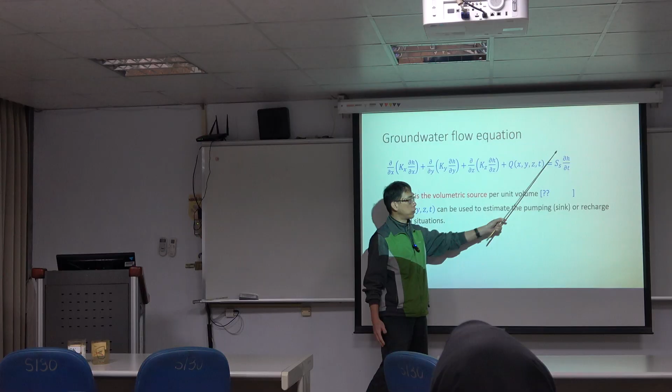Emphasize again, emphasize the content. So in the groundwater flow equations, we have two parameters, meaning the hydraulic conductivity and storativity. And these two parameters control the groundwater behaviors in the hydrogeological system. So if the storage is able to be ignored, that means we go back to the so-called steady state condition. So we will only have the hydraulic conductivity to control the whole behavior. We don't need to consider the storage coefficient, or we do not have the storage effect.

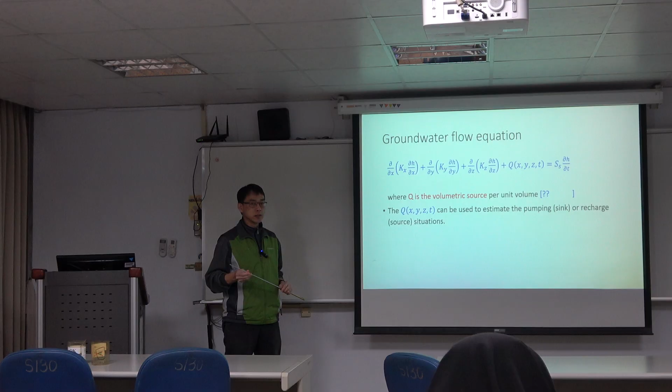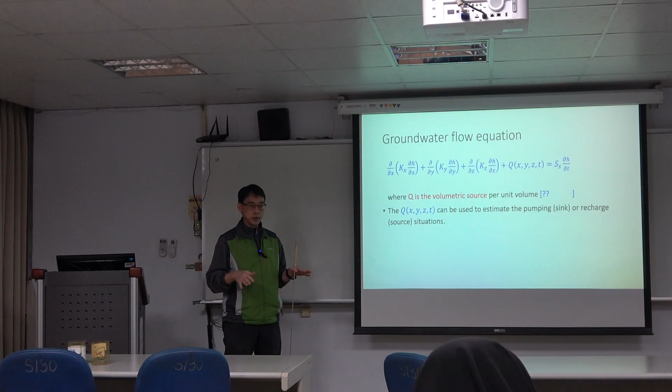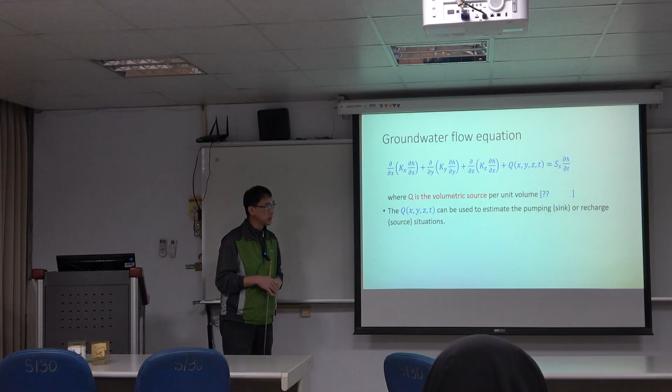So one of the important things is that when we're talking about the steady state, it does not mean there is no time influence. That means the time is infinity. So when time is infinity, they will reach an equilibrium condition. But in reality, groundwater still flows. Okay, it does not stop flowing. It still has flow, but the flow in is equal to the flow out. So it just gradually moves. Okay, so the head quantities do not change. So let's read what we mean. The storage effect is ignored. So the storage coefficient only exists for transient state conditions.

And we said the storage coefficient is quite interesting because it provides the extra water that we pump. So when we pump water in an unconfined system, it is very easy to imagine because the water just releases from the pore spaces. So the water is drained from the pore spaces to your well, and we are able to collect the water. But for a confined system, it will be a little weird, because it looks like it does not have water change. There are no water variations, but we are still able to collect water.

So researchers use two mechanisms to explain the behavior. One we call compressibility of the matrix. That means the pore spaces are compressed, so the water is squeezed out. And the other is the water's ability to expand. So when you decrease the pressure, the water expands, so the extra water can be provided. So these are the two mechanisms for the confined system.

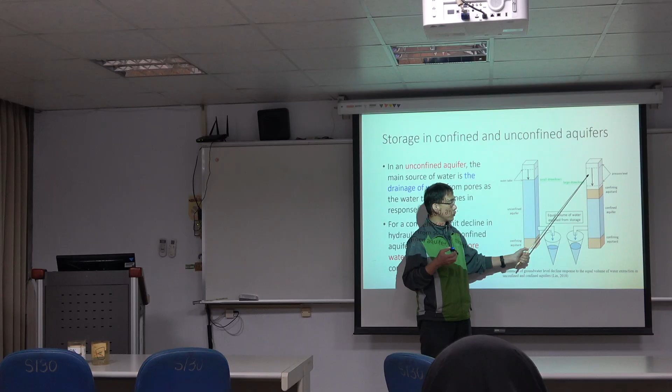So as I mentioned, if we take a look at the whole picture here, in the confined aquifer, all the water occupies these spaces, but we have the imagined water level. Okay, the imagined water level will decline. That means the pressure in the system declines. But in reality, we are not able to observe this kind of decline.

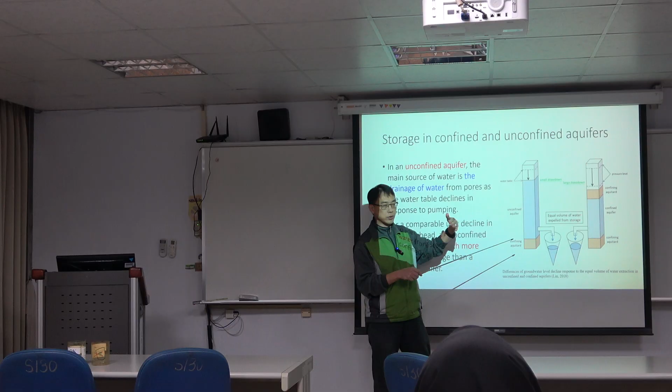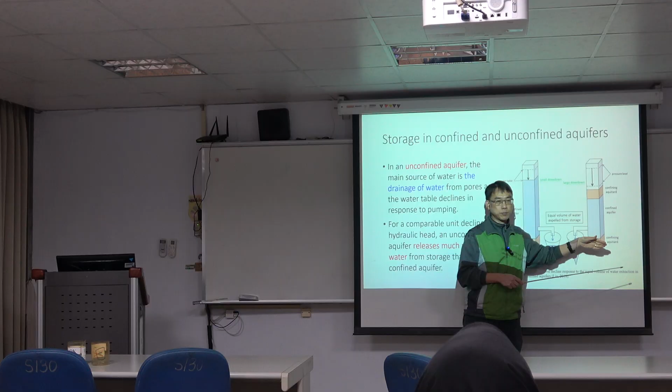So regarding geophysical surveys, I also asked some of the professors in hydrogeological survey. They mentioned they can use geophysical surveys to assess groundwater level variations, because we have saturation and unsaturation, so they can use resistivity or conductivity to assess this interface. It could be possible. But I asked them if their methods can assess this kind of behavior, because the water does not change. What changes is only the inside pressure. So are geophysical surveys able to detect that or not? They mentioned maybe not. Okay.

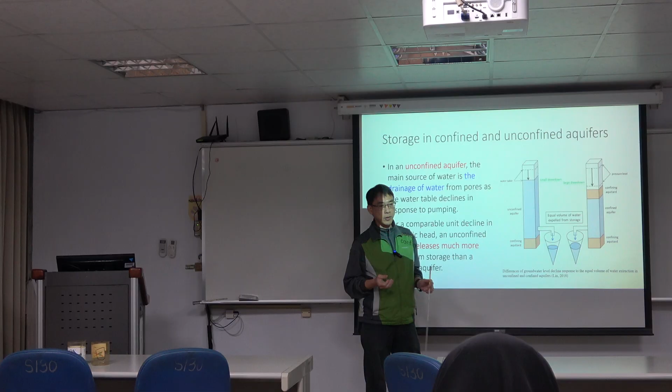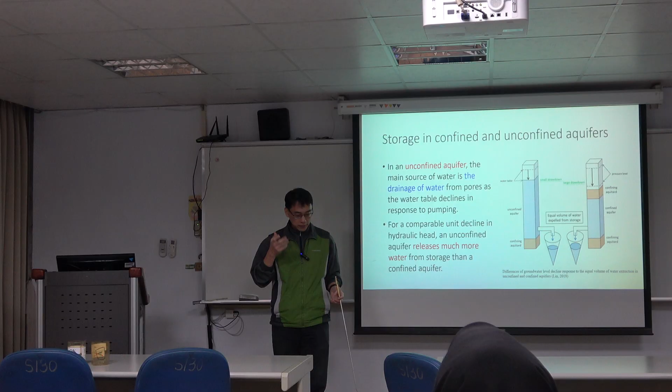So geophysical surveys are used to survey groundwater conditions, commonly in the unsaturated zone. But for the saturated zone, right now it's maybe not easy to detect. But I guess it's still possible. For example, if we use gravity, the water amount could vary. Like I mentioned, originally the water is dense, but after it expands, maybe the total water amount still decreases, or its density decreases, or its mass decreases. Okay, because if we look at the concept of expansion, originally the water is very condensed. So after we release the pressure, it expands, so it becomes not so dense, it becomes loose. Okay, a concept like that.

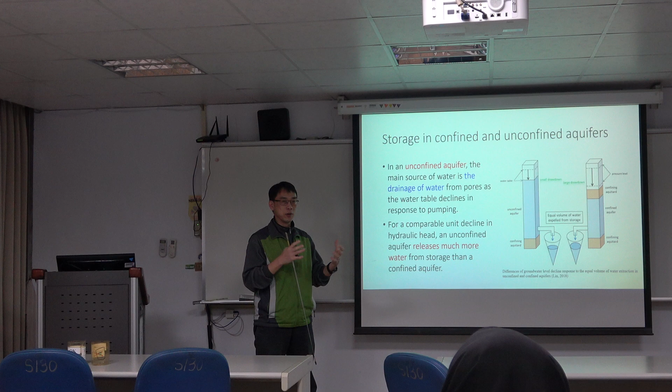So maybe their mass will change due to the gravity change, due to the density changes. Although in the groundwater system, we always assume that the density, viscosity, and the other properties are the same; they do not change. Okay, so that's the assumption from groundwater hydrology. We do not consider the change for that.

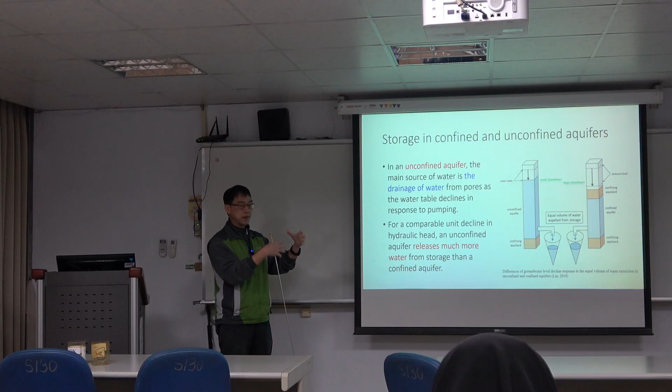And if you would like to assess more completely, you need to consider the compressibility of the soil matrix and also the water. That will be more complete to describe the behaviors. But for the gravity term, you also need to consider the gravity term change. Not gravity term, we call it the body force. Okay, the body force might be affected. Gravity is the same, but if your density or your mass changes, it will also be affected. Okay, so it will be quite complex if you'd like to assess more completely.

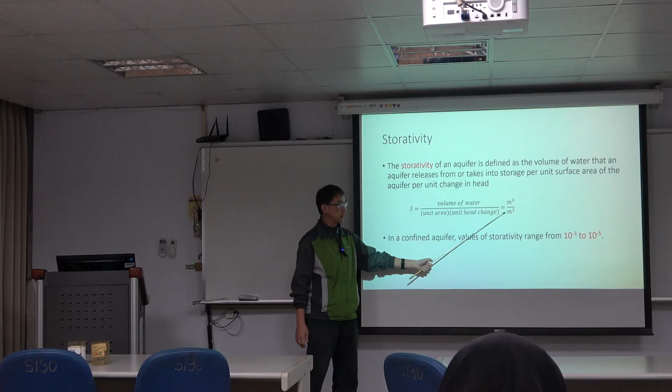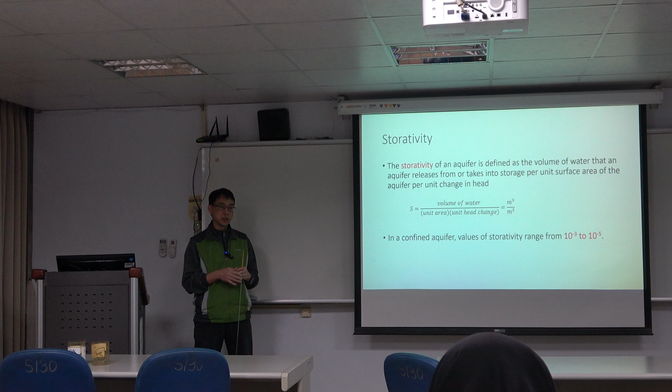Okay, so for storativity, the concept is you need to count the head, how much water is released. So the concept will be like that, but we sometimes use the unit area. Okay, so we will obtain this kind of quantity. So the storativity, you can see, has the unit cubic meter divided by cubic meter, so we do not have a unit. And the quantity for confined systems is relatively small because, as I mentioned, confined aquifers mainly release water from matrix compression and also the expansion of the water. And we can imagine that it could be quite slight, not so large an amount.

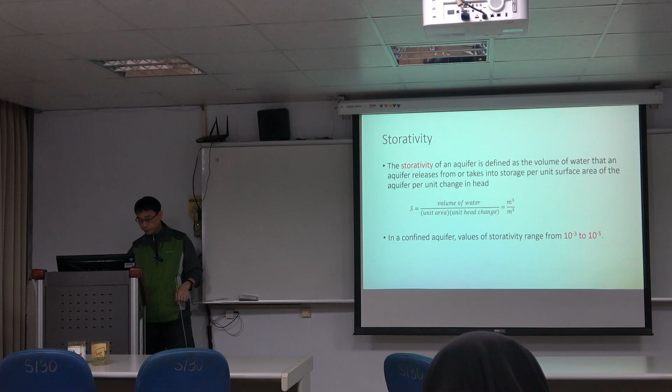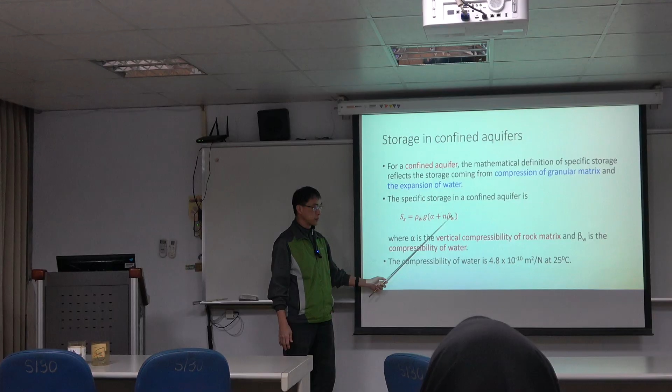And if you take a look at the compressibility of the water, approximately 10 to the minus 10, you'll be able to know that this quantity is quite small. Okay. So although you multiply by gamma W here, the quantity is still around 10 to the minus 5, so it's also not quite large compared to the specific yield or the unsaturated zone.

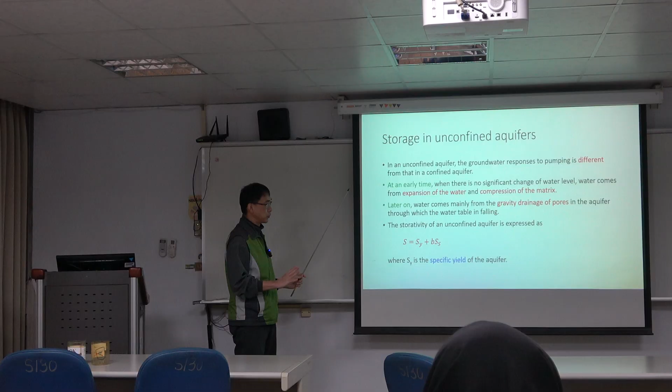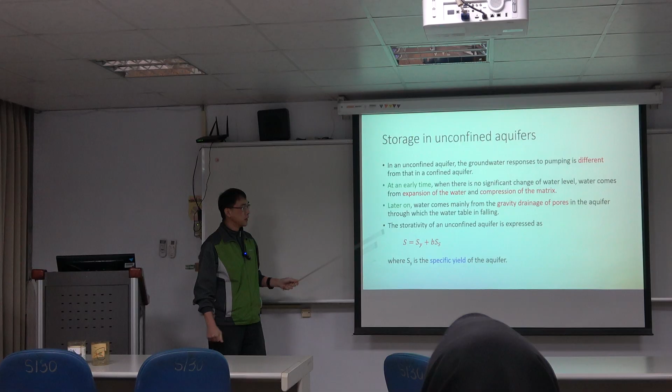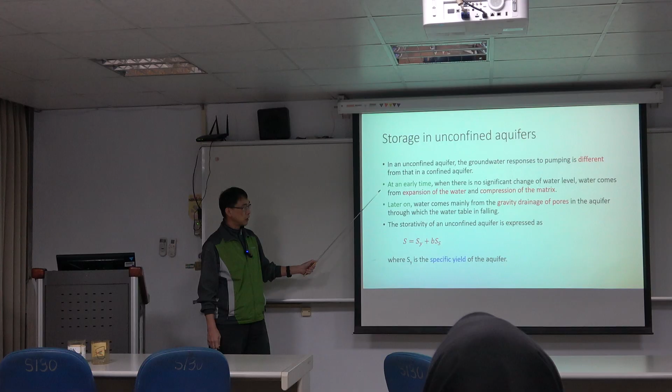And for unconfined systems, we can separate into two steps, the early time and the later time. In the early time, the condition is a kind of undrained condition, like a confined condition. So in early time, we are able to use the storage coefficient from the confined system, and in later time we use gravity drainage to describe the behavior. So that means the storage coefficient can be combined from the specific yield and specific storage.

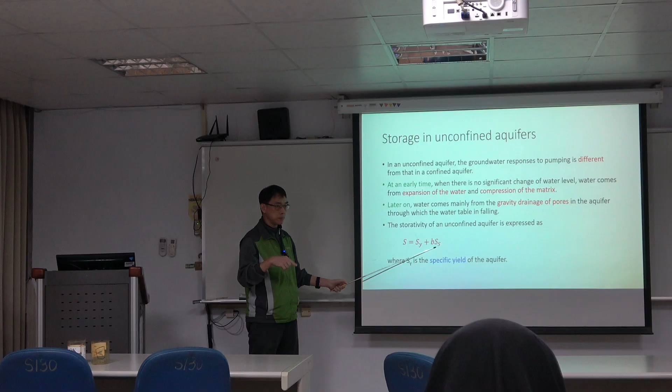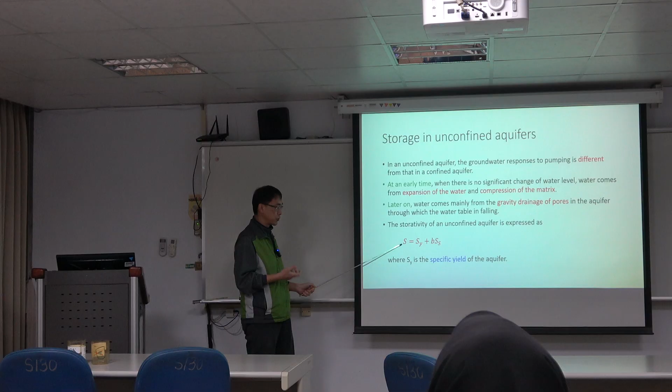But remember that in physical equations, all the units need to have the same dimensions. So SY, SS, we know SS is 1 divided by meters, the length. It has the unit of length. So we need to multiply by the length, and then we can eliminate the unit to become dimensionless. And this is dimensionless and dimensionless, so they can be added together. Okay, we call this specific yield and specific storage, and combine them together to be the storativity or storage coefficient.

And as we know, specific yield is relatively large, and this is for the unconfined system. That's from gravity drainage, and it is highly related to the porosity. So the quantity is commonly from 0.1, not 0.01. Okay, 0.1 to 0.3, because commonly the porosity is around 0.3. It could be higher, but not very common, because when you have a higher porosity, it might imply that you have silt and clay, and they do not easily drain by gravity.

Okay, so for the unconfined, this quantity, for the confined, this quantity. So although we can write them down together, we know that this quantity is relatively small. Okay, three orders smaller, and if you have a very thick aquifer, maybe it's still able to have a relatively larger quantity. Compare with the SY values, commonly of order 0.1.

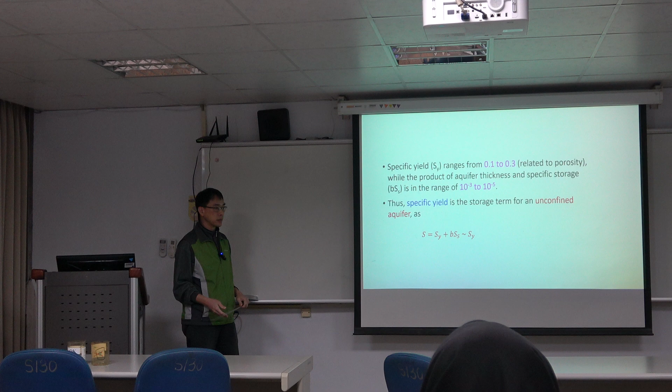So this quantity will be relatively small, and we will simplify or eliminate this term, and we can only have the Sy values. So in unconfined aquifers, commonly we use the specific yield, not the specific storage coefficient. Okay, so this is the concept.

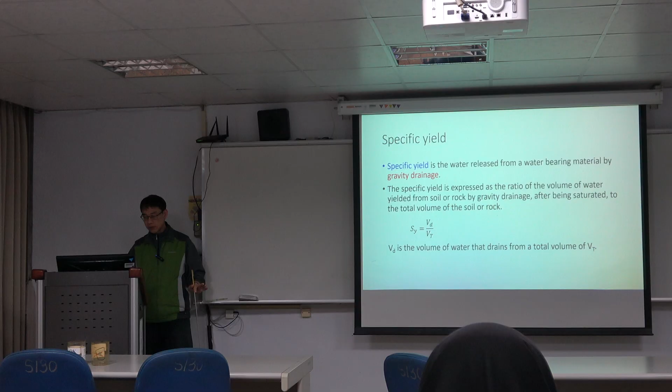And the later content I think I will skip, because they try to combine it with specific retention. That's the residual part. I think we already mentioned it last semester. So if you don't understand that, maybe you can read it by yourself. So the concept here is a very important part.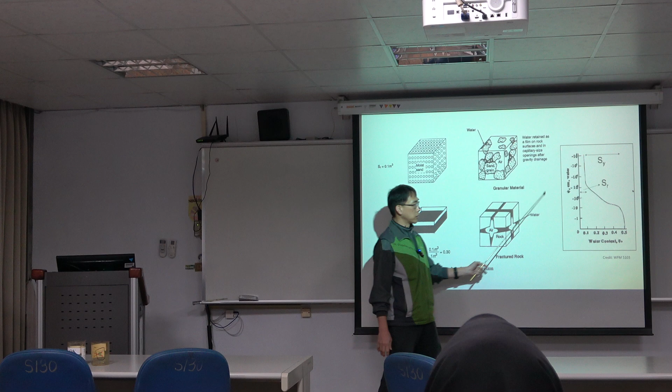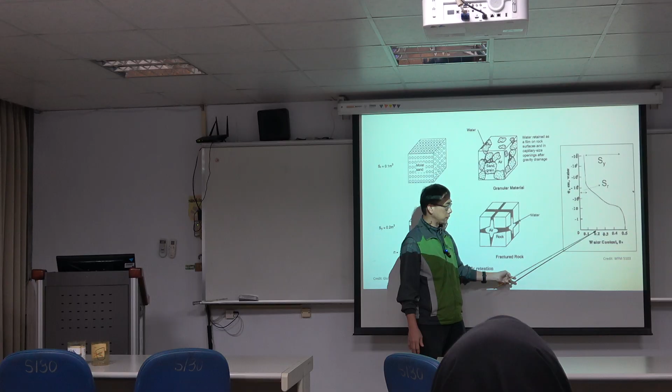From the original, this is the water content, or if we use fluid saturation, there will be a kind of porosity concept. Okay, and this is the head. So this is the general behavior when you have high water, and then drainage due to gravity. In the very beginning, we can see that the water is not easy to release, but over a specific period of time, or if you increase your suction head, you will be able to release more water.

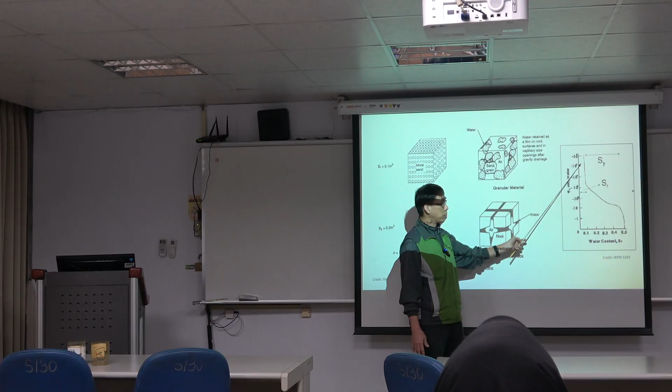And the water content will decline. But at the end, it will be very, very difficult to get the residual water out. So this part we call the residual content, or retention. We call it specific retention. Okay, so this is some information for you. And the concept is that specific yield plus specific retention will be the porosity. So that's the concept that we mentioned.

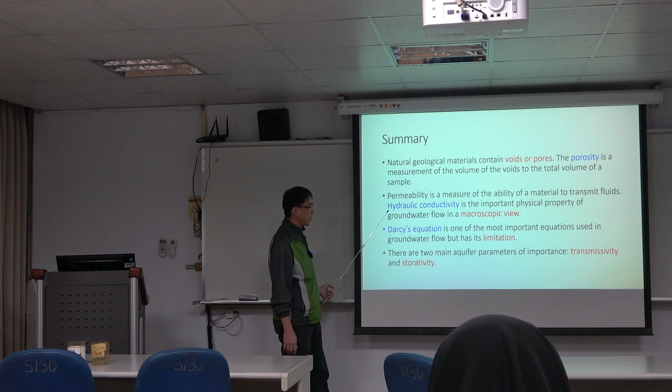Okay, so very quickly summarize the parameter part. Natural geological material contains voids and/or pores. Porosity is a measurement of the volume of voids to the total volume of the sample. Permeability is the measure of the ability of the material to transmit fluid. And hydraulic conductivity is the important physical property of groundwater flow from a macroscopic point of view.

And Darcy's equation has some limitations. So be careful that Darcy's equation is not always obeyed for the system. And the two main aquifer parameters are transmissivity and storativity. These are for the aquifer properties. We use pumping tests with type-curve solutions to estimate these quantities. We will talk about how to do that in a later lecture. Okay, so very quickly reviewed the parameters. Any questions about this?

Following, I will introduce the concept of the hydrogeological survey. In the very beginning introduction of the course, we already mentioned it a little bit. And following, I tried to use an AI system to help me do some preparation and also combine it with some of the materials together.

Recently, the university asked us to use AI systems, like we talked about in the very beginning. Not only for student learning, they also help professors use AI to prepare material. So I tried to use it, although just a little bit, not much, because some of the content is not complete. And in the future, maybe we can also use AI to generate some data for you to do the analysis. That could be more useful for preparing the materials.

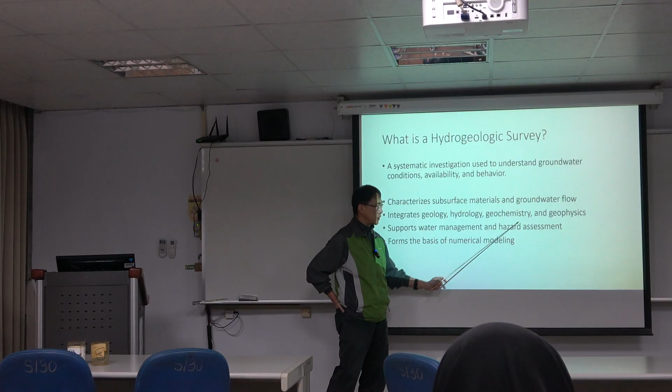And in geochemistry we use some of the environmental tracers, ions, or isotopes to identify what could be the source. I don't know if you are familiar with that. We're using geochemistry to identify the source, or what percentage is combined from the different water sources together.

And geophysics is very commonly used for the hydrogeological survey. That could be from the surface, as I mentioned. We can use that to identify where the bedrock could be and what the sediment thickness could be. For example, seismic surveys are commonly used to identify the beddings. So if you have very strong bedding reflections, you'll be able to provide the information for that. And some geophysical surveys will be able to provide the content, like the clay content. They have a different response, so you will be able to detect the clay.

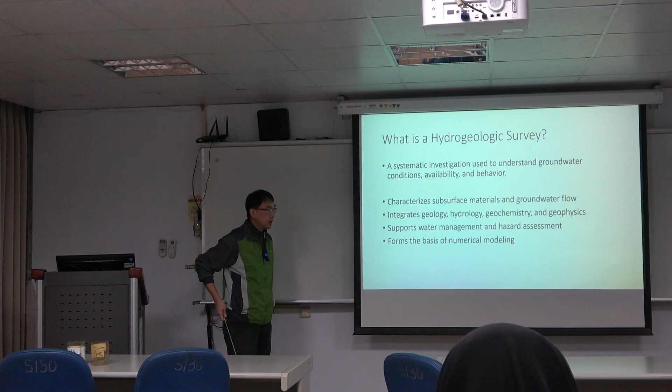Or you might be able to detect the fluid phases through conductivities. If you have geothermal or some of the fluids, they will have high conductivities and you'll be able to detect that. Or low conductivity, like contamination. You might be able to identify where the low conductivity area could be; they might have the contamination there. So geophysics is very commonly used for the geological or hydrogeological survey.

And they support the water management and also the hazard assessment. So in most conditions, we try to understand the water part. We try to find out where the main reservoir for the water resources could be. So most of the geological surveys are to find the potential site. For example, in Africa, they do not have sufficient surface water. Right now they know that underground they will have a lot of water storage. But where could be the suitable place to drill the wells so you can gather sufficient water? So they need a hydrogeological survey to understand where to put your wells, and then you can do the production. So that's for the water management or water resources assessment.

And hazard assessment. As I mentioned in the very beginning, when we're talking about hydrogeology, there could be three main issues. One is the water quantity, how much water we can obtain. That's a very important part. And water quality, whether the water is suitable for drinking or for irrigation. Industrial use will require a lower standard, so it will still be okay. So commonly these two are very commonly used for groundwater hydrology.

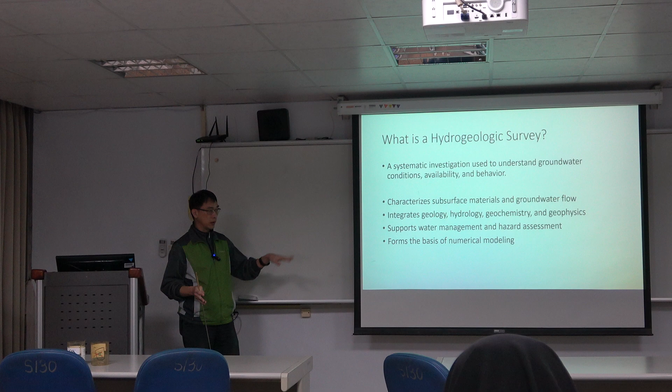And another could be soil liquefaction. If the water level is high, you will have high liquefaction potential. Okay, because in the shallow part, they have relatively lower overburden from the surface, so the loading is relatively less. We mentioned the total stress, and they have two bearing parts. One is water, one is the effective stress.

So when your total stress is very small, that means your pore pressure increases by a relatively small quantity and can totally bear your total stress. So you easily have liquefaction. Okay. And another part is if you have, not clay, it's fine sand, in the shallow depth, and your groundwater level uplifts, then that area might easily liquefy.

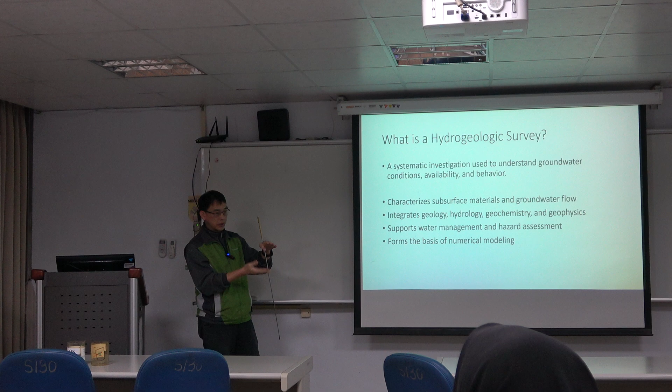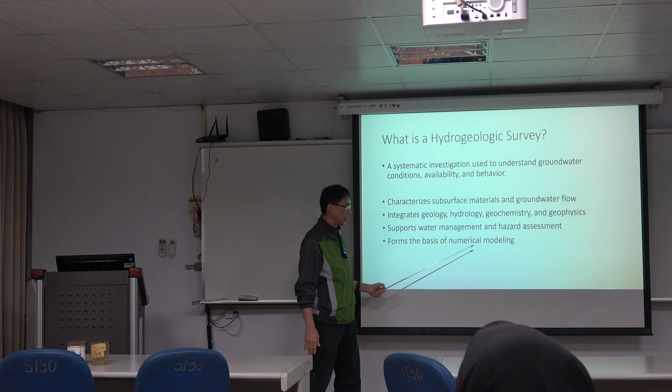Okay, so there could be two factors: the fine-grained material and also the high water levels. And another, I mentioned that for slope problems, slope stability, groundwater plays a very important role. So commonly you also need to know the variation or the groundwater flow patterns in the slope areas, and then you will be able to assess if they have high potential to induce the hazard or not, the landslide.

And the final could be they can form the basis for numerical modeling. And numerical modeling will be able to provide for different disciplines like water resources, safety assessment, hazard assessment, and even management issues, or even solute transport or contamination transport. So the numerical model will be more widely used.

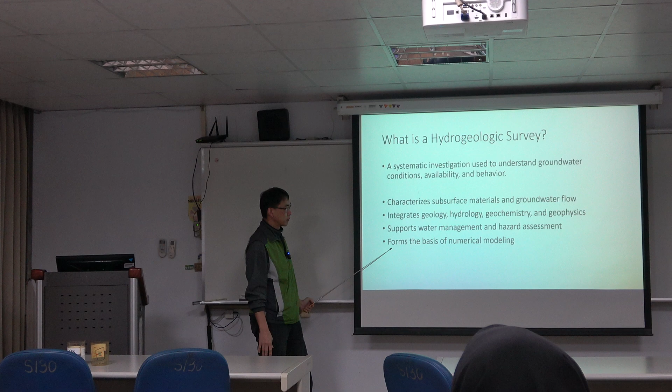So that could be a tool to use, but you need to have the complete geological survey, and then you'll be able to provide the basics, like I mentioned last time a little bit, the geological system, the hydrogeological system, and how it affects the numerical result.

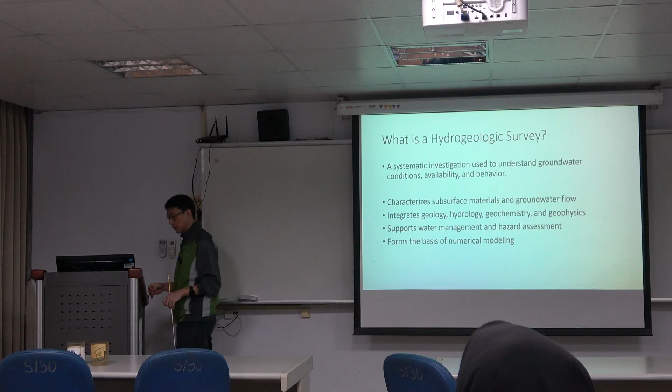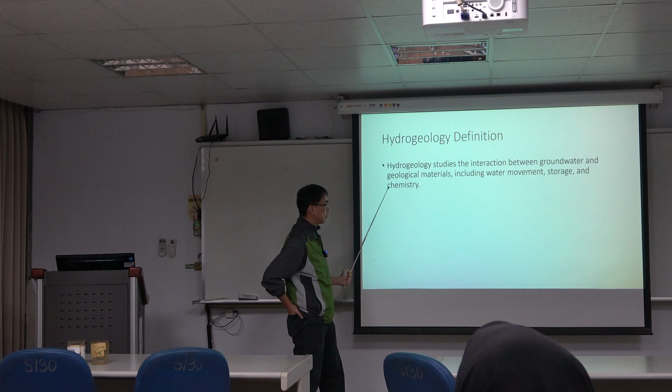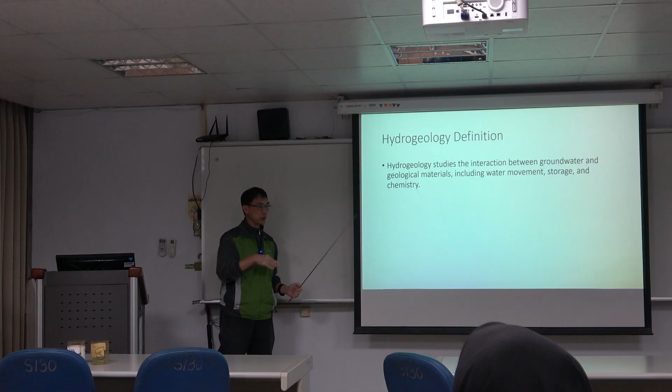And the definition: hydrogeology studies the interactions between groundwater and geological materials, including water movement, storage, and chemistry. So this is what the AI provides, but you can see that most of the concepts are approached from water resources issues. So storage is the amount of water, how much water you might be able to obtain. And movement will be how fast the water flows or how much water you can pump.

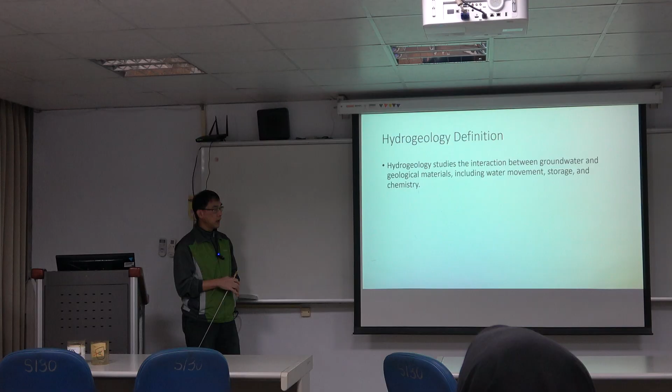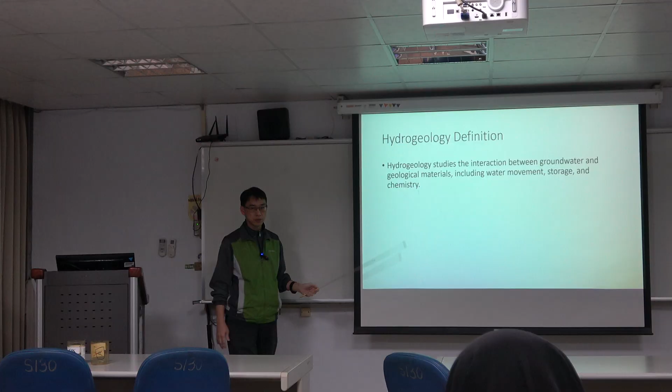If the material is very fine-grained, you cannot use a very huge pump, or it'll be dry. Your well will dry, and your pump will burn. So you also need to understand how fast the water flows. And chemistry is to assess if the quality is okay for drinking or irrigation. Okay, so you can see that when they define hydrogeology, it's meant for water resources. This is from the AI system. Okay.

And for hydrology and hydrogeology, commonly when we're talking about hydrology, it's focusing on surface water processes, and it can also depend. Different disciplines might use different terminology. For example, does hydrology include the climate, weather? I don't know. But in the wider definition, hydrology should combine all of them together, like what we call the hydrological cycle, or sometimes the water cycle.

They have the climate, the cloud, the rainfall, infiltration, evapotranspiration, runoff, groundwater infiltration, and recharge. So that depends. But if we do not define clearly, hydrology means surface waters, meaning rivers, ponds, runoff, like that. And hydrogeology will mean the subsurface systems. But right now, as I mentioned, sometimes it's not easy to distinguish hydrogeology or the groundwater system; they combine together.

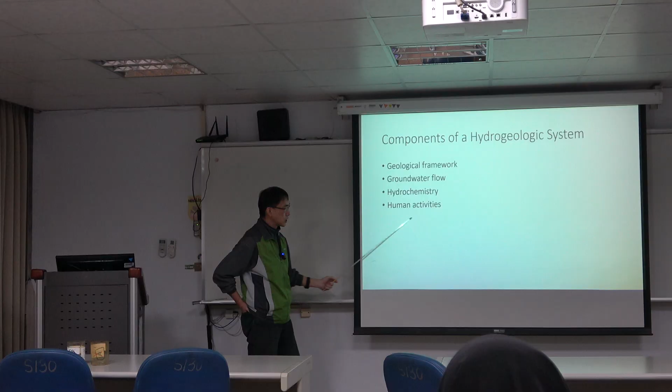And the components of the hydrogeological system: there will be the geological framework, which is the solid part; groundwater flow, the fluid part; and then there will be the chemical part. So groundwater flow will be the physical part, how it flows, and the chemical part will be the quality issues, and human activities. So if we have pumping, there will be human activities in the system.

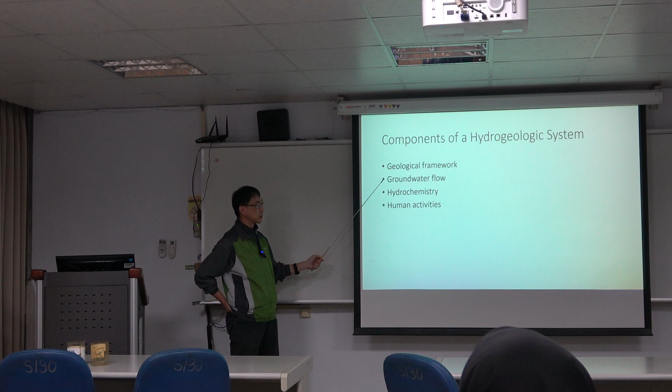Okay, so when we consider hydrogeological systems, we have mainly three components we might need to consider: the solid, the fluid, and the fluid is also separated into the physical part and the chemical part, and then the other factors, like the human activities, how they affect the system.

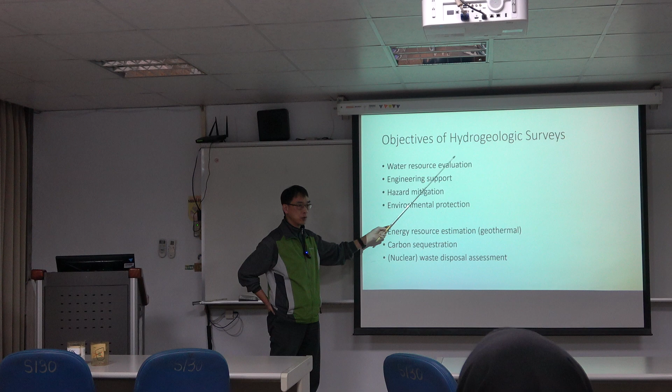And the objectives of the hydrogeological survey can be separated into several points. The first part is, okay, the water resource evaluations. As I mentioned, most hydrogeological surveys support water resource evaluations. The second part will be engineering support. As I mentioned, when you would like to construct underground systems, you need to pump water out, and then you will be able to have suitable engineering constructions, and even tunnels.

I think some of the local students will know that we have the Hsuehshan Mountain tunnel, and they had a very huge amount of water drainage when constructing the tunnel. So it took much longer to finish the tunnel. So how to handle the water to support engineering work is a very important part.

And as I mentioned, water resources is mainly to collect water for usage. But for engineering support, commonly it is to prevent the water. Water becomes the problem, so we try to remove the water. So it's a different concept.

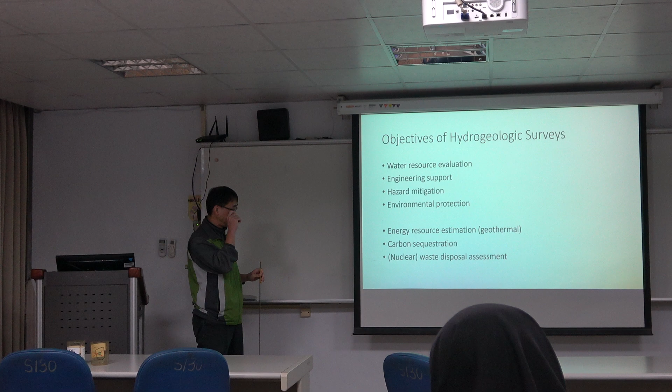And hazard mitigation is mainly like liquefaction or slope stability. I think these two could be the two parts. Although some of the liquefaction could be a little bit connected, and for some cave-ins, like on a road, you have cave problems, and it is also affected by the groundwater system, sometimes natural groundwater, sometimes human activity. So not easy to distinguish.

And the fourth part will be environmental protection. Although it's not easy to understand this part, for example, there is the base flow concept. The base flow is from groundwater outflow, commonly in mountain areas. So in the dry season, we can see that the river still has water, but we do not have rainfall.

So recently, maybe local students have watched some of the news reporting that this year we might have very dry conditions. It's a 75-year dry condition because the rainfall has not been sufficient in western Taiwan this early year. From November to May is the dry season in Taiwan. Right now it's March, so we still need to get through March, April, May, three months. So right now the water is not sufficient. We do not have that much rainfall to supply western Taiwan.

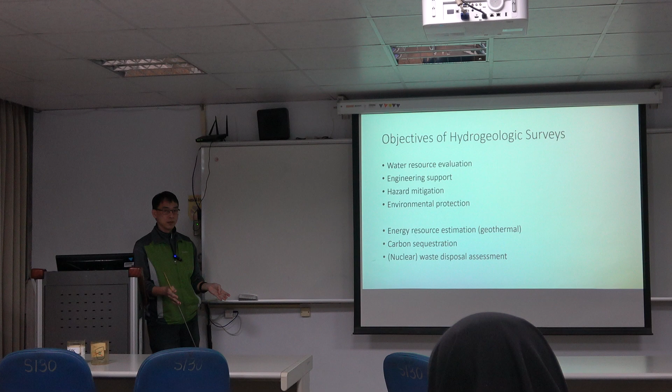But when you go to a relatively big river, you're still able to see water outflow. We still have water there, so it comes from what we call base flow, drained from the groundwater system to the river channels. So this kind of groundwater will be very important for the environment. If you do not have water in the dry season, the animals in the river, like fish, will die. So this will be one of the important issues.

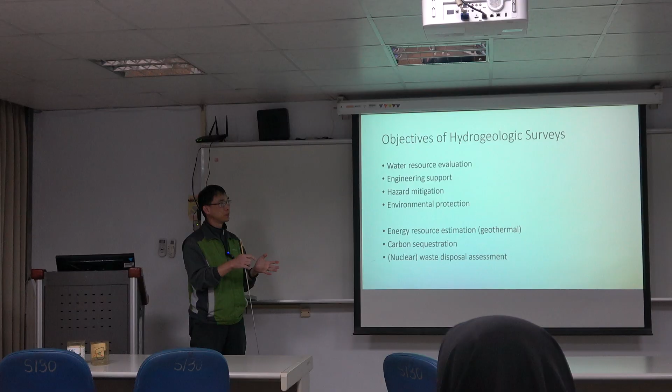And right now in Taiwan, maybe not completely, but in some places they try to collect groundwater to fill the river to keep what we call 生态基流量, the ecological base flow. We need to keep the minimal water flow to prevent the ecosystem from being damaged. So sometimes we pump water to fill the rivers to protect the environment. So that is one way it can be connected to environmental protection, although it's not easy to directly connect it.

Okay? And in some places maybe they have plants you need to keep, which connect to the groundwater system. And furthermore, as I mentioned, when we're talking about hydrogeological surveys or hydrogeology, it is mainly for relatively shallow or sedimentary areas.

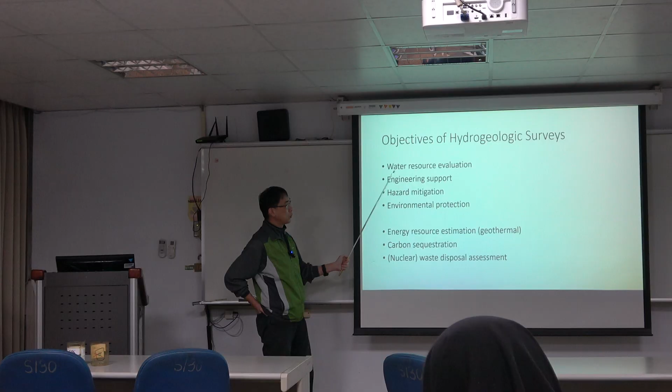But if we take a wider look at definitions of hydrogeology, they can include the rock system or the deeper systems. If we include that, a further purpose of doing a hydrogeological survey is to understand or estimate energy resources, like geothermal. But this is mainly for the rock. Although in some places the hot water is in a sedimentary area, like the Jiaoxi area. Although the source is from the rock system, the main exploitation area could be in the sediment area.

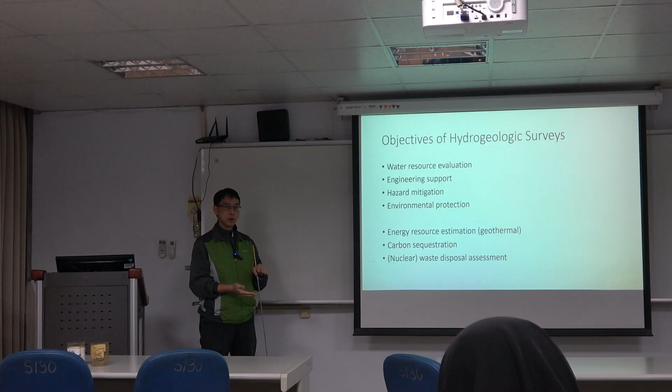Another could be the heat pump. Heat pumps are relatively shallow, they could be hundreds of meters deep. We use the groundwater like a kind of air conditioning, because groundwater is relatively stable in temperature. So in winter, we can use the groundwater to warm up our room, but in summer, we can use the groundwater to cool the room. So we call it a heat pump. The system pumps groundwater and circulates it in the room spaces to control the temperature. That's for the energy part.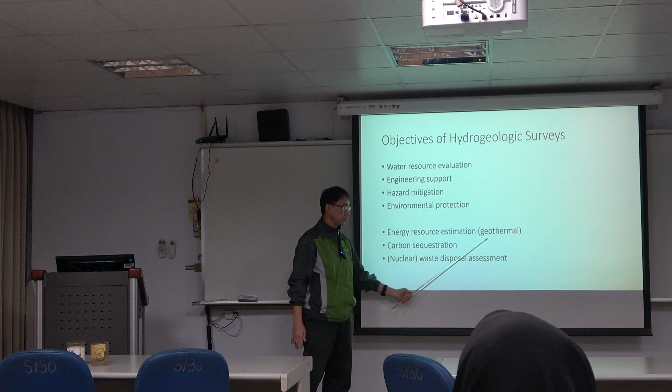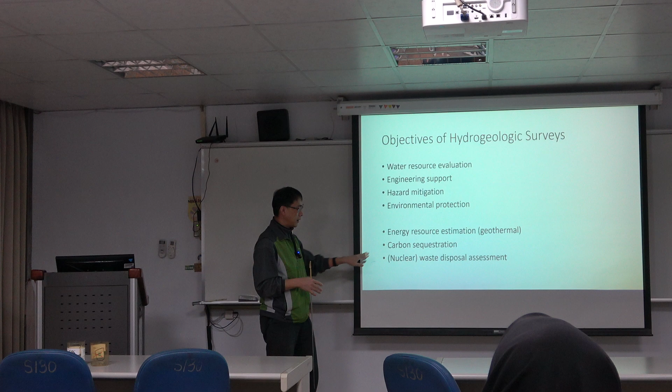And carbon dioxide sequestration, or carbon sequestration. Recently in Taiwan, we try to develop several sites to store carbon dioxide. They can decrease the carbon dioxide and help meet net zero. Although I don't know if that's good or not, right now we try to do that. Carbon sequestration is from the end part: we try to take the carbon dioxide and store it in the subsurface.

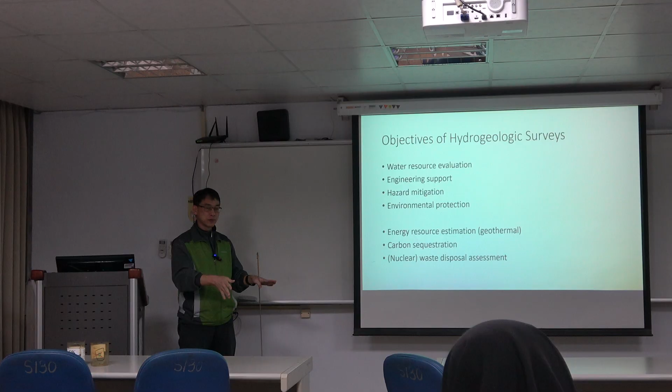So we need to understand the geological structures. We need to understand the seal system. We need to understand if there are fractures or faults that could release the carbon dioxide or not. So we also need to do geological or hydrogeological surveys. So that's a deeper system.

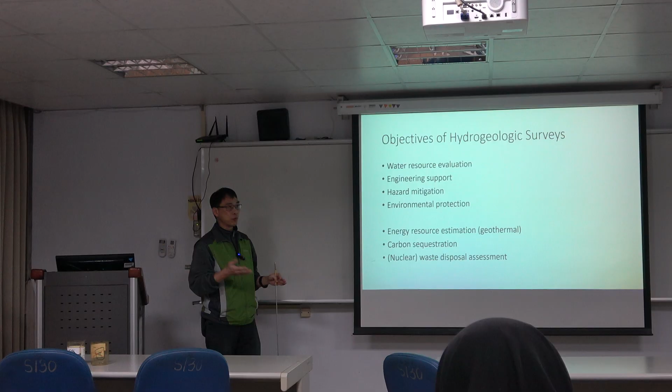Another could be waste disposal assessment. Commonly it is for safety assessment, and that could be nuclear waste, or a backfill or landfill with normal waste. These can also have these kinds of conditions, and we need to prevent leakage. So commonly, if that's a landfill area, we need to find out if the material is relatively impermeable. If we have more clay or mud, it will be better to construct this kind of disposal site.

And for nuclear waste, we need to find a crystalline rock system, like granite in Taiwan. We try to find granite for the nuclear disposal system. But we need to do some investigation. We need to understand if the area has a high fracture system and high permeability, or if there is groundwater there or not. We want little groundwater. So we need to do drilling for the survey, and even assess the fracture systems: do they have fractures or not, or how dense is the fracture system?

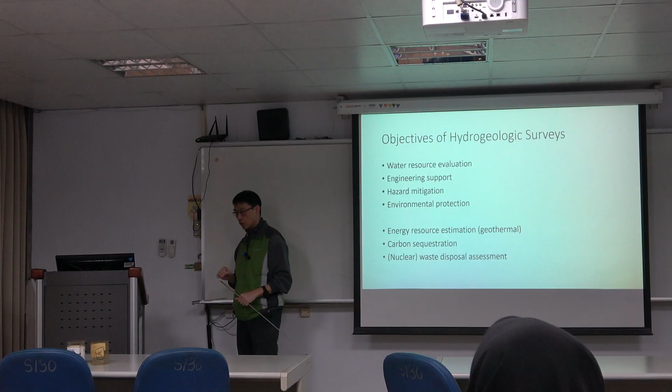And if the rock space is large enough, or if there is some activity, like a fault, there will be a preferential flow path that might release the nuclear waste. There will be a problem. So these several could be relatively deeper or approach the rock system. Commonly when we talk about hydrogeology, we do not include them, but for the wider definitions, maybe we should combine them together.

And the key questions in hydrogeological surveys could be like this. Also the same, the previous part is provided by AI. Where is the groundwater located? We try to find out where the main groundwater reservoir for water resources could be. How fast does it move? So we need to understand, like I mentioned, permeabilities. Is the extraction sustainable? Is there sufficient recharge?

When we consider water resources, we know the groundwater system is maybe not isolated, but it's like a reservoir, so we have recharge and discharge. If recharge and discharge reach equilibrium, there will be no problems, and it will be more sustainable to use. So commonly, when we assess whether a reservoir is suitable or not, we also need to find out if it has a sufficient recharge rate or recharge source.

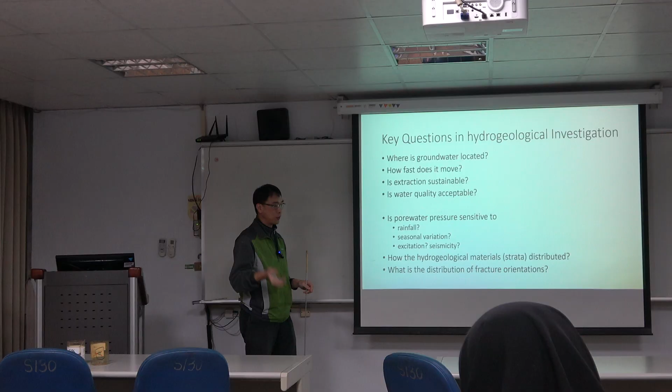If the reservoir is isolated, when you pump water, it becomes dry and there will be big problems. Although in some places they directly take the water and don't care too much, they don't care about the replacement. There will be problems for that.

But for sustainable usage, I think sustainable extraction will be a very important part. So we commonly need suitable pumping management, pumping quantity management, how large a pump you can use. And then water quality: as I mentioned, for irrigation or drinking, we need to confirm if the water quality is okay or not.

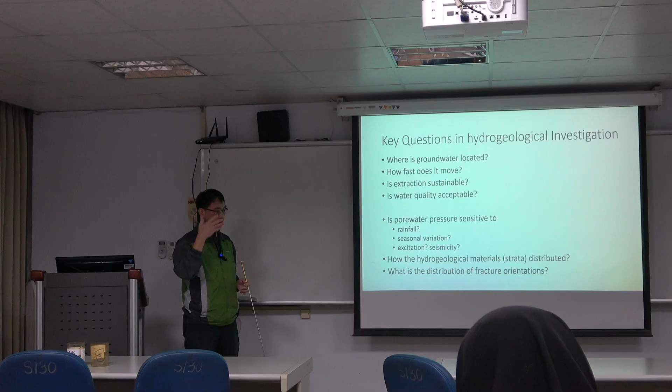Some waters, in natural conditions, have arsenic. Some of you might know that arsenic could be toxic and induce cancer. In Taiwan in the past, we found arsenic in some places, mainly the western or coastal area. Arsenic is very common. It exists in the natural system, but normally it does not have toxic conditions because of the oxidation conditions.

The environment has aerobic and anaerobic conditions. In some of the conditions, they will change their ion format. I don't know how to say it in English. They will change their system, like their charge, their ions. I don't know how to say that chemical part, I'm not familiar with that. So they will change their format.

Originally they will be safe, but after you pump, you induce more oxygen inside the system. So they change their environment, and then arsenic is released, or it changes to another toxic format. After that, the water has contaminated conditions. So arsenic in nature is very common, but some formats are toxic, some are not. If you change the environment, you might release the arsenic.

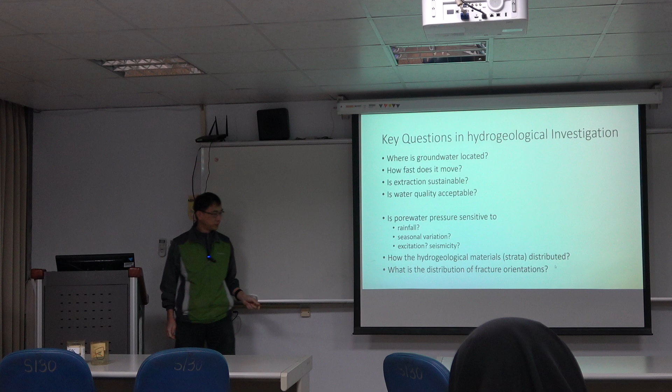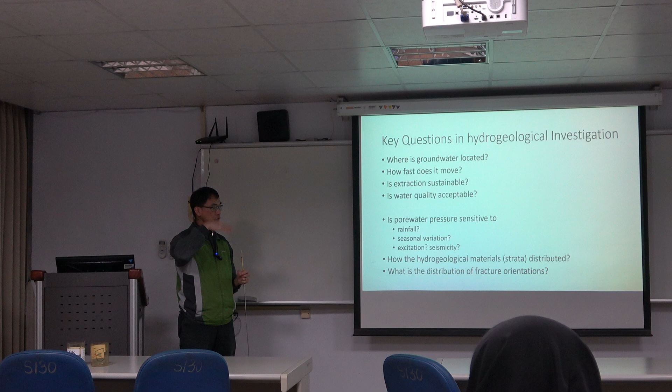Furthermore, this is for water resources, but for hazards or some engineering systems, we might also need to understand the pore water pressures. Pore water pressure is sensitive to conditions like rainfall. If you ever take a look at groundwater observations, you will see that groundwater level variations could be very large. Some places are more sensitive, some are not so sensitive.

Like in the Taoyuan Zhongli tablelands, rainfall cannot directly infiltrate or recharge the groundwater system. So the groundwater level variations in Taoyuan are very slight, very smooth, without large variations. But in the Zhuoshui River alluvial fan, the groundwater level observations vary a lot, with 20 meter variations. In the wet season they increase, in the dry season they decrease, by over 20 meters.

In the plain area, or in the alluvial fan, from the proximal fan to the distal fan, the variation also differs. The proximal fan is commonly occupied by relatively coarse material, like gravel. In this kind of material, the variation of the groundwater level will be very huge, because the pore space is large, so it is easy to drain out and also to recharge.

We use the storage coefficient to describe this kind of behavior. So we can say they have a very large storage coefficient. They easily have drainage behaviors. So if you have very high variations, you need to be careful. For example, I mentioned in the Yangmei case, they did not consider the variation of the groundwater levels.

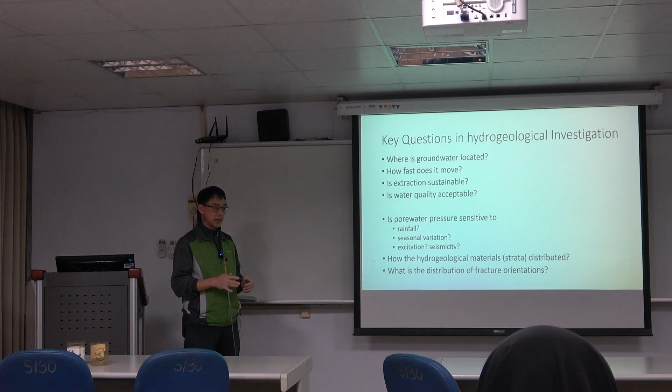And another could be the excitations or the seismicity, like I mentioned, liquefaction issues. Some places will have a very sensitive response. We call it volumetric strain sensitivity. We can use the volumetric strain sensitivity or strain sensitivity concept to assess if the site is easy to be liquefied or not. If the groundwater system is very sensitive to seismicity, your water pressure increase could be very large, could be 1 meter. So that means when you have a strong seismic wave, you might have liquefaction occurring there.

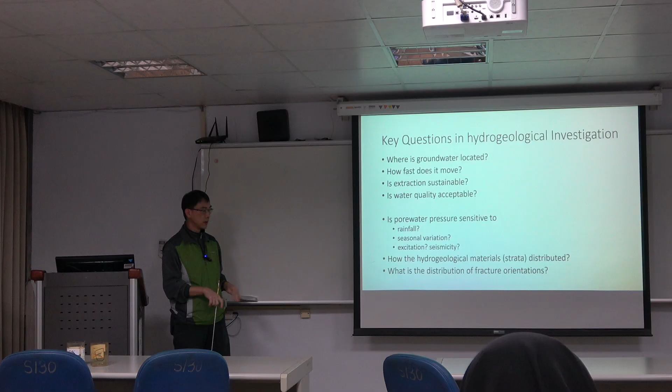Sometimes we use the site effect, but the site effect considers the softness of the materials, and commonly we do not consider the water, so be careful. We are doing some earthquake hydrology work, and we can see that seismicity-induced water pressure change differs very largely in different places. And commonly for the system with more fine-grained material like clays, your water pressure increase could be higher because they become a kind of undrained condition. And if you have gravels, water pressure dissipates easily, so you might not accumulate water pressure there. So be careful about these kinds of issues.

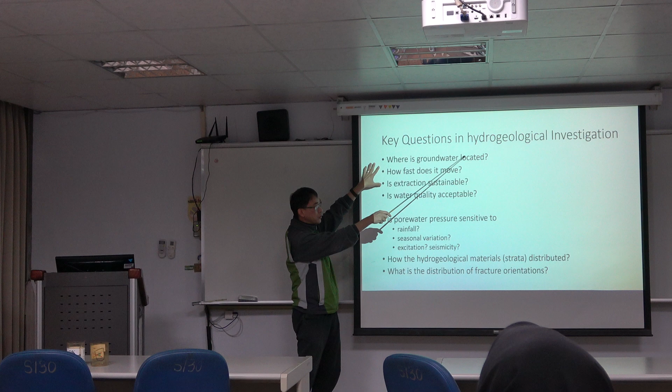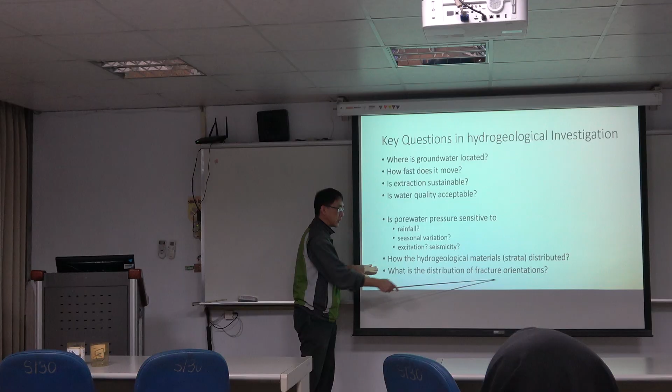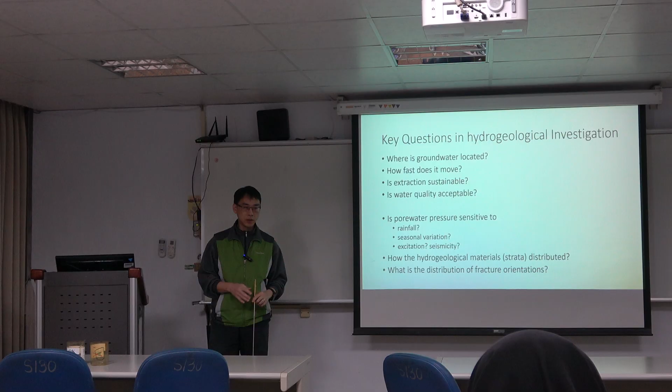Okay, and how the hydrogeological materials or the strata are distributed. This part is not only for the water. Originally they used the term groundwater investigation, but I think we use hydrogeological investigation. So you also need to consider the solid part, the hydrogeological material, and also the fracture orientations for the rock system. The upper part could be the sedimentary system, and the lower part could be the fractured system. You need to understand the hydrogeological material because it affects things quite largely, especially subsidence, liquefaction, or other parts. Water resources may not be so largely affected, but the others could be. It depends on scale. And fracture orientations will matter if you want to find a geothermal system, store CO2, or store nuclear waste there. This information will be very important for that.